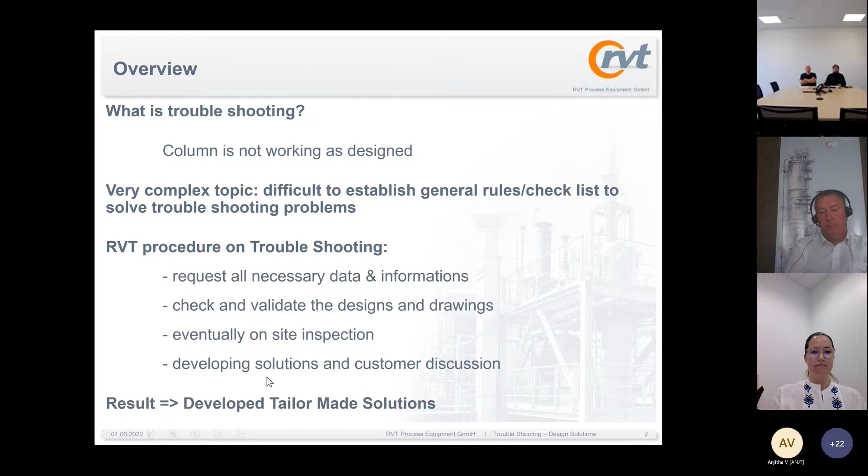So in this presentation, we will start talking about a troubleshooting problem which is commonly occurring for many customers we deal with, and it is troubleshooting related to fouling. Then we will present three case studies dealing with troubleshooting on different internal parts: a liquid distributor, a gas distributor, and a droplet separator. So I will start with the topic troubleshooting related to fouling.

As you know, if we are talking about fouling, we can identify regarding internals inside the column, packings, etc. We can identify typical problem zones.

There are more sensitive zones to fouling: liquid distributors, collectors, droplet separators, and obviously also the column sump. Packing can be seen as less critical, but only if we are talking about random packings with a considerable size, somewhere above 50 millimeters, and in combination with rather high liquid loads. If we have a very low liquid load, the fouling has an easier time accumulating at some parts.

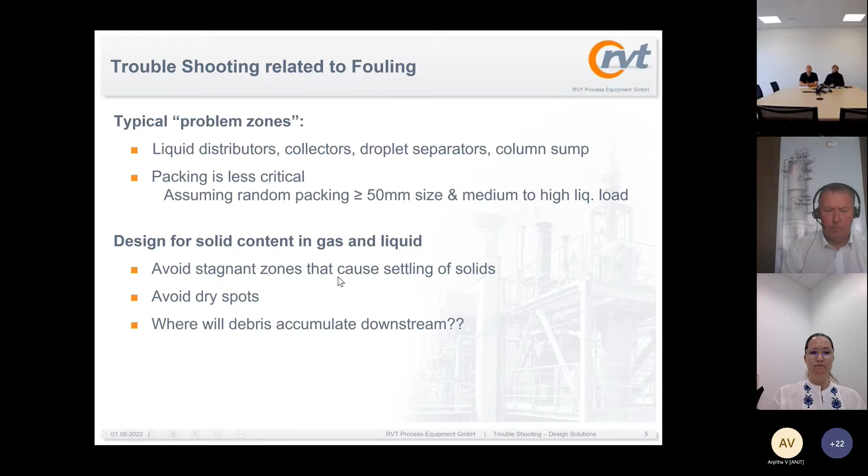Now I will continue. We obviously have designs that are optimized to deal with solid contents and to avoid stagnant zones causing settling of solids, to avoid dried spots. But nevertheless, customers have contacted us in the past, every year, with pictures showing blocked distributors after they saw a malfunctioning of the column regarding its performance.

So we see here a trough distributor made of plastic, and you can see that the troughs are almost completely, some of them, filled with mud. Then we are asked how we could optimize the geometry, the design of such internals, so that they do not require so much maintenance work, and especially not in such short periods of time.

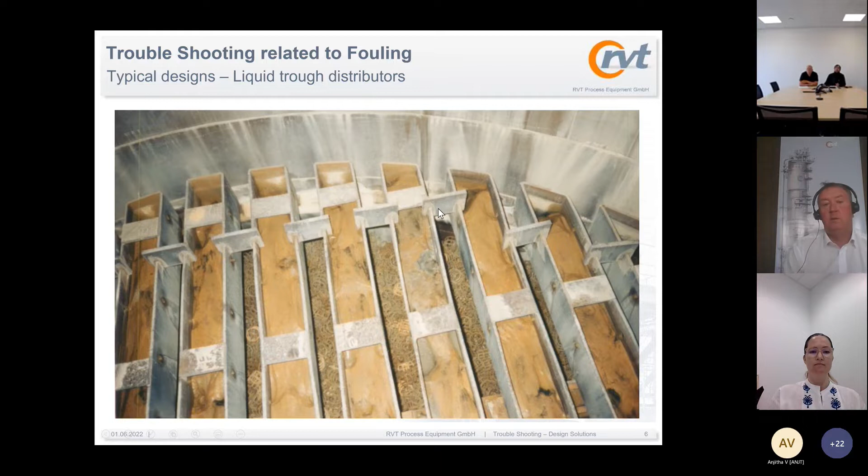The solutions we have developed and delivered to our customers dealing with very dirty, fouling applications, I would like to show you in the next slides.

Here you can see a special trough distributor design where we have used obviously big ground holes, as big as possible, in the troughs themselves. But we have here a special feature. You see here the main feed pipe and the secondary feed pipe feeding the individual trough. But you can see here a smaller pipe. This smaller pipe is now also delivering the liquid additionally at the end of the trough.

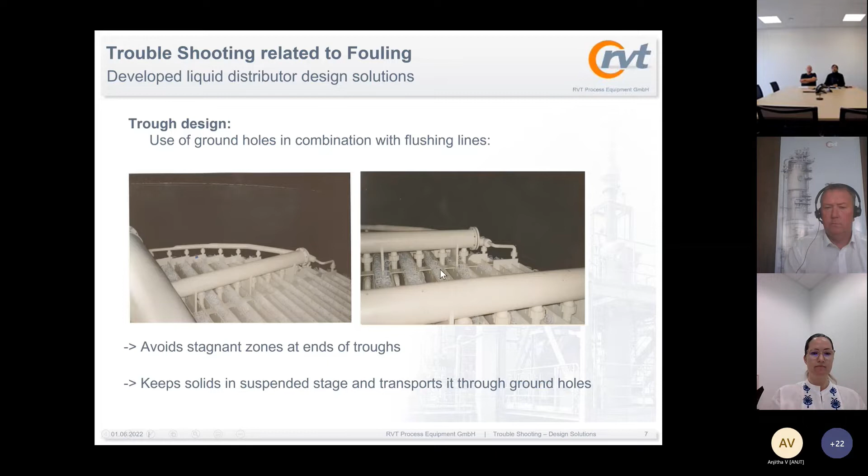At both ends of the trough, we would have symmetry, another pipe and another flushing. So here, the stagnant zone where the liquid is calm and the mud would accumulate is flushed, put into movement, forced to move, also at these critical slow motion areas, so that we avoid the stagnant zones, the solids keep suspended, and they do not accumulate in the trough causing this massive blocking of mud and malfunctioning of the liquid distributor.

Another possibility we have developed for a customer was to combine the troughs, so we don't have individual troughs with stagnant zones at both ends. Now we have a pair of troughs that have been combined, so that the liquid can steadily move continuously.

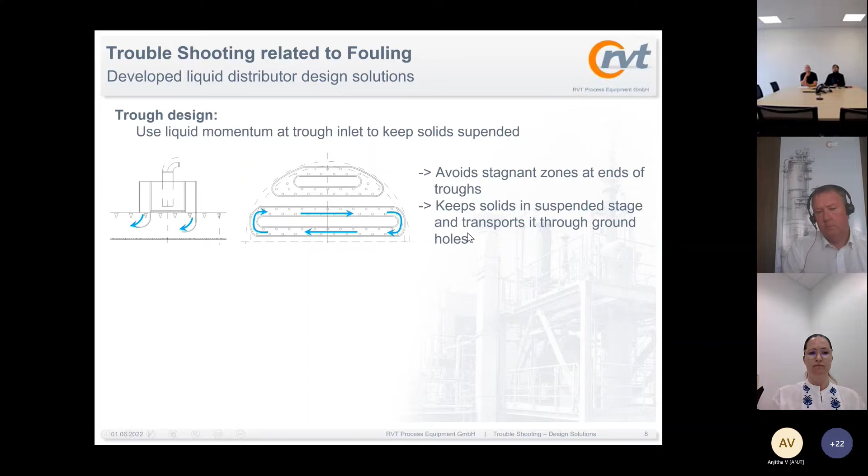And how we achieve this movement, here you see a parting box feeding the troughs, and the parting box has been foreseen with these bending, S-shaped plates, so that the liquid becomes a momentum velocity in one direction, so that solids are suspended and the mud leaves the troughs and does not accumulate. We have done this for a fertilizer plant.

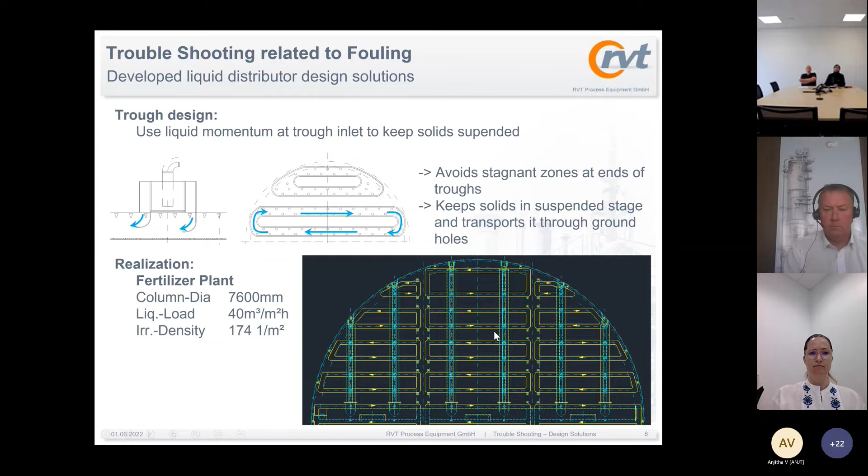As you can see here in the drawing, it's a huge column with support beams, and here you see the troughs inside the column, 7.6 meters in diameter.

Another solution that we developed for another customer: in this case, he had really big problems with the mud, and even though we presented these solutions, he wanted something even better, so he could really be sure that the mud, even when moving as in the other case, would not accumulate.

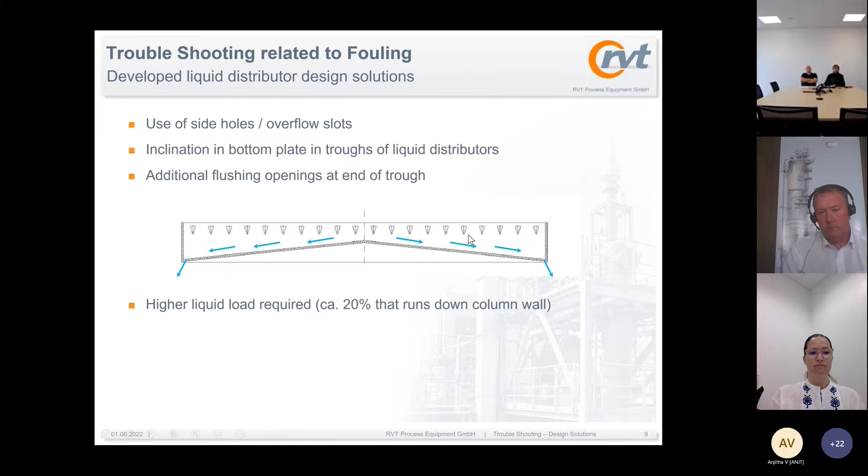So what we did, we used not a flat trough floor, but an inclinated floor. At the end of the trough, here and here, there is an opening at the bottom. You will see it here, in the built liquid distributor, the trough distributor.

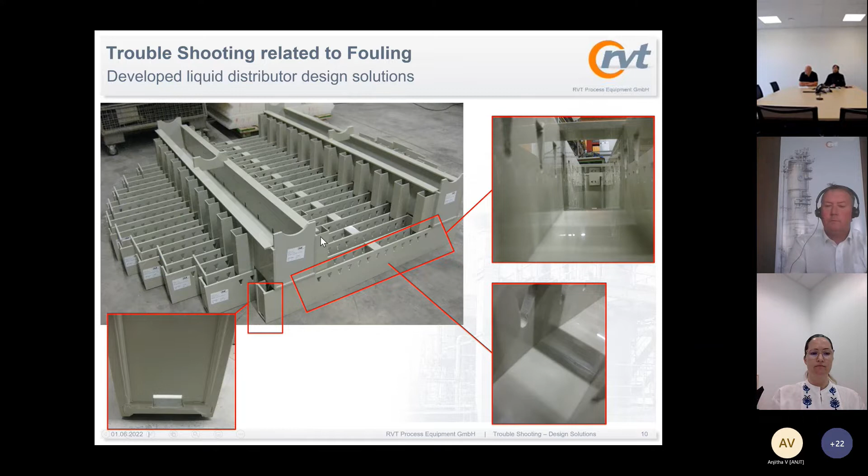As I said, now the troughs are not connected, but they have the bended floor. You can see here the middle section - this is exactly the middle, and then it goes down to the side here and here, and the very end is open. So now we don't create that movement, but by making these very big holes, and with the slope, we can be sure that the mud will easily leave the liquid distributor and not accumulate there.

And finally, for the same customer - or maybe another customer - what we did was a solution so he can flush the trough and free it from any solids during maintenance work.

You can remove this end plate. This end plate at both ends can be removed when maintenance works have to be done, and then liquid can be flushed inside the trough, and everything that might have accumulated will be very easily cleaned. And the most important thing, as you can see here, there's no need to dismantle this liquid distributor.

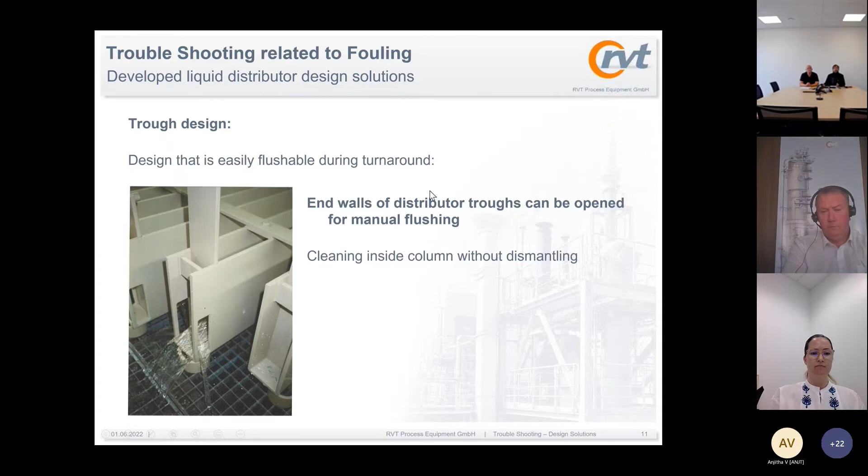During the maintenance work, you can easily remove the plate, put your flushing tube pipe here in the middle, and easily remove all dirt from the trough.

The next example that I want to share with you is how we offered a solution for a customer. He was having problems with a liquid collecting tray element. You can see how the collecting tray looked like - it was almost completely blocked.

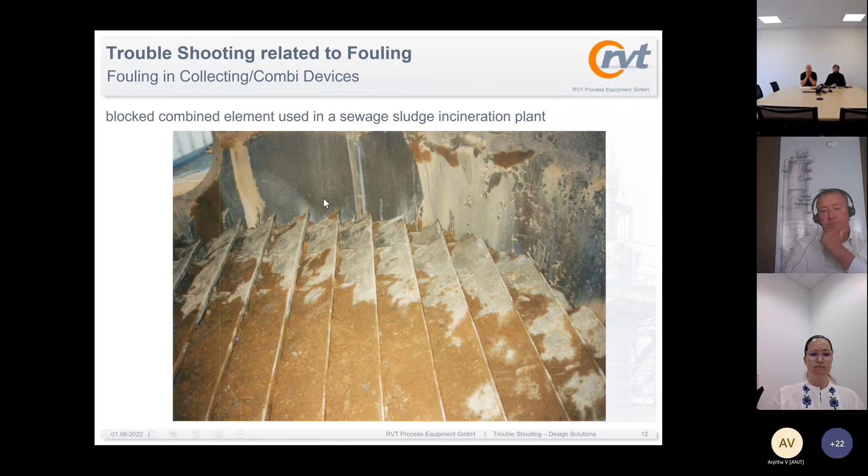This customer had already bought this combi element, or collecting tray element, from two different manufacturers, and with neither of them could he run the plant more than a couple of months before complete fouling of the collecting tray occurred. They contacted us to discuss this and find a solution that is not state of the art, because we also had similar constructions, but we developed a solution for him.

We presented that, and I want to show what we came up with. So you see here what we call the liquid collecting combi element. Combi element because it has two functions: on one side it supports the packing, it works as a packing support, but also as a collecting device for the liquid.

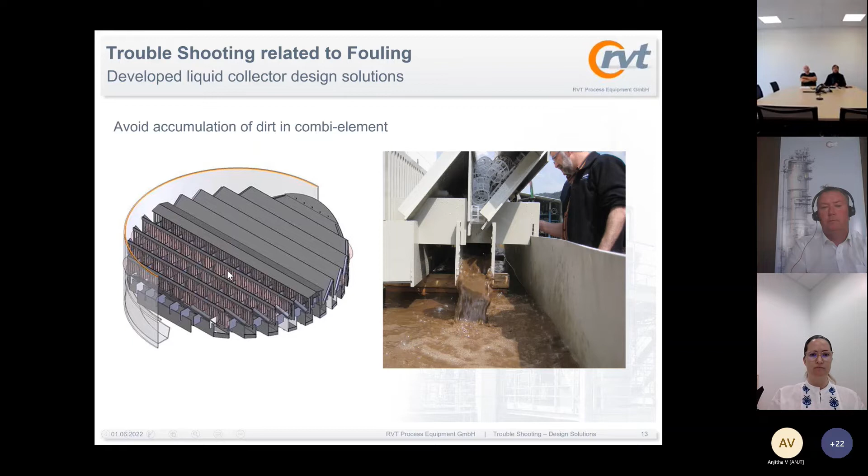And in this part, we have removed the collecting vanes that deliver the liquid to the individual troughs, so you can see what is below - this kind of grid. This is there so that the packing doesn't enter the trough and block the ground holes, etc. We need to foresee this.

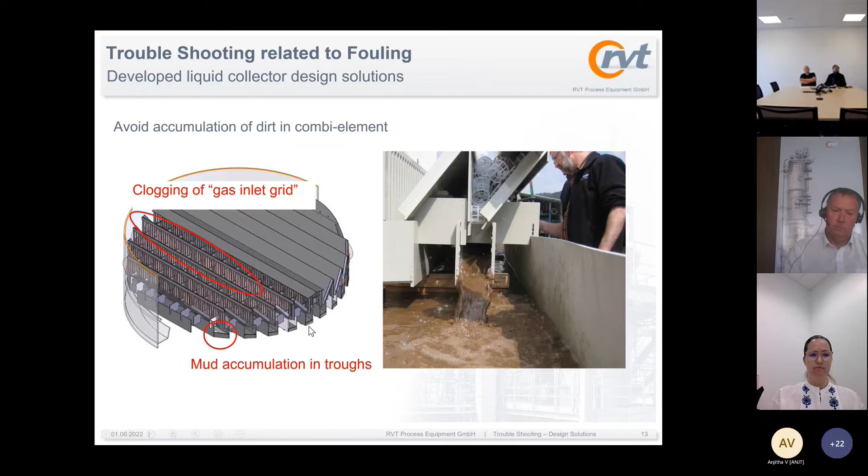But with this design, the disadvantage - this is the state-of-the-art combi element design - we have risk zones for fouling, for solid accumulation. This is the clogging at this inlet grid where the rings will obviously also be there, and on the other side, we have these stagnant zones at the end of the troughs where mud can accumulate.

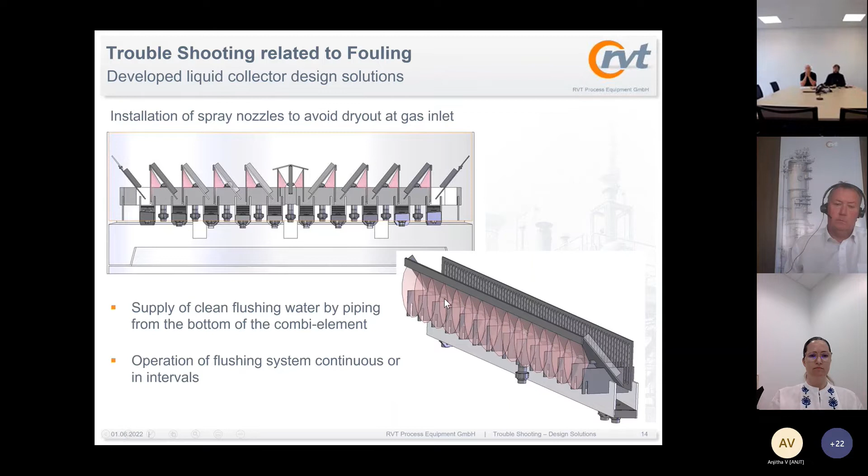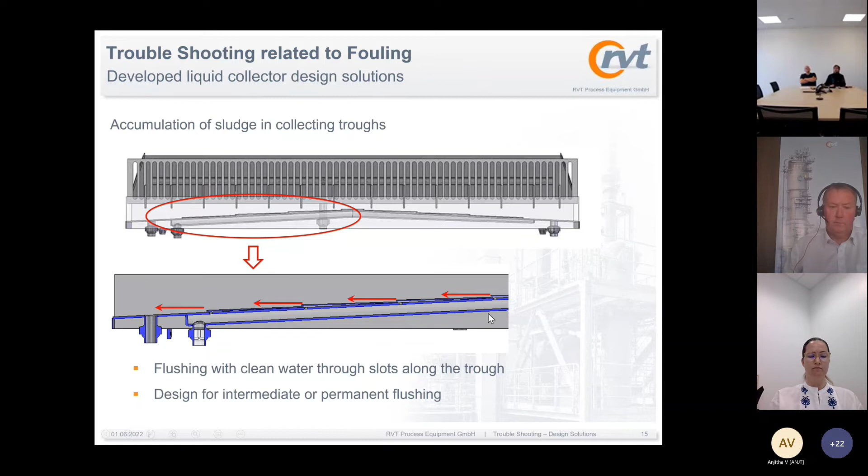The customer was very happy with this solution. It worked perfectly, worked excellently, and he can now run the column steadily without fouling problems. So it's a very good story to tell.

The next example I'd like to share has to do with troubleshooting on a liquid distributor, not dealing with fouling this time.

In this case, we were dealing with a flue gas scrubber in an incineration plant where heat was recovered by cooling condensation. The problem the customer faced was that the heat recovery the column was designed for couldn't be reached.

He opened the column and installed temperature devices, 16 temperature devices distributed across the column section. You see here an Excel sheet cut, with the numbering of the 16 devices, their positions, and the temperatures measured by each.

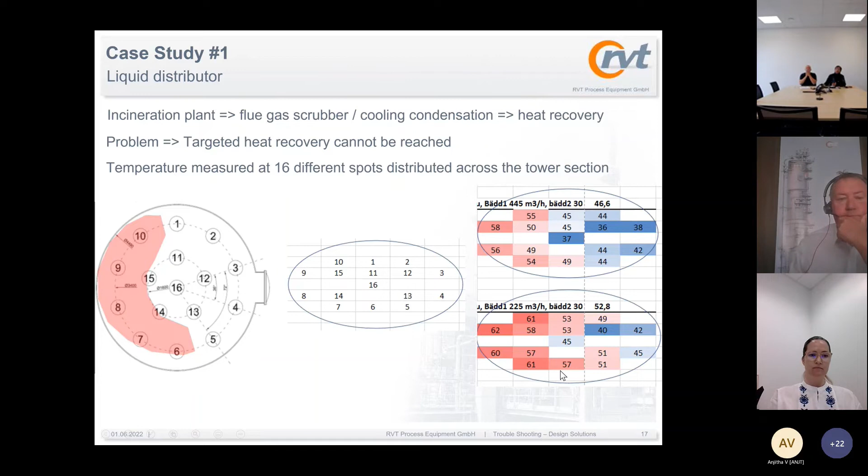Blue means colder, red means hotter, the darker blue the colder and the darker red the hotter. We can easily see there was a significant difference in temperatures depending on whether the devices were placed on this side versus that side. So we were asked what is happening in this column.

We looked at all the documentation we have regarding the column. It's a big column, above 4 meters in diameter, with 3 packed bed sections and a quench section below. There's a first condensing section where the gas is cooled down to about 40 degrees, and then a second bed above it to further cool down and recover more energy.

The first important thing we wanted to know was where these temperatures had been acquired. The customer told us they measured them above bed number 2. Having said that, we couldn't yet know what was happening, because we didn't have a temperature profile there to identify if something was coming from below and affecting what happens above. This was still an open question.

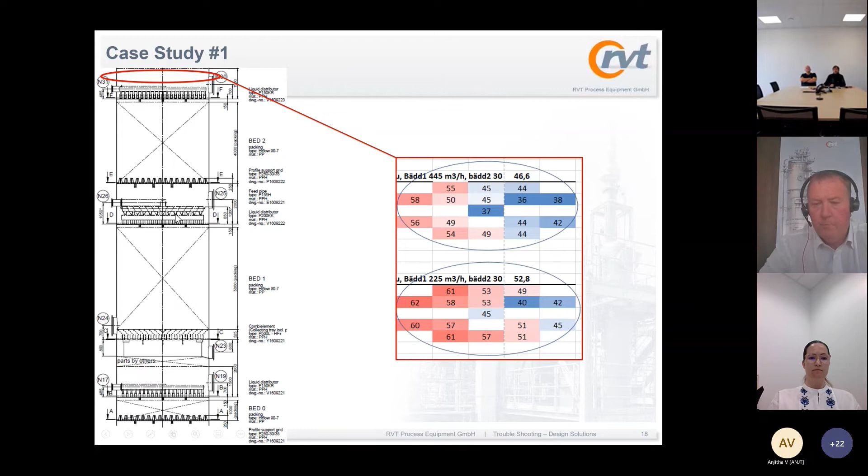What we needed to analyze was our design of the liquid distributor. How were both liquid distributors, here and here, designed? Is there any error?

So first we looked into the liquid distributor just below the section where the temperatures were taken. Here's the drawing of that liquid distributor. It's a trough type liquid distributor with single troughs, not connected. We weren't dealing with fouling here.

The liquid is introduced into the trough by a piping system with smaller pipes that have an orifice plate, which differs depending on the trough being fed. The orifice diameter is different because the central troughs need more liquid, having more drip points. So to achieve homogeneous distribution, the orifice plate feeding each trough has to be adapted.

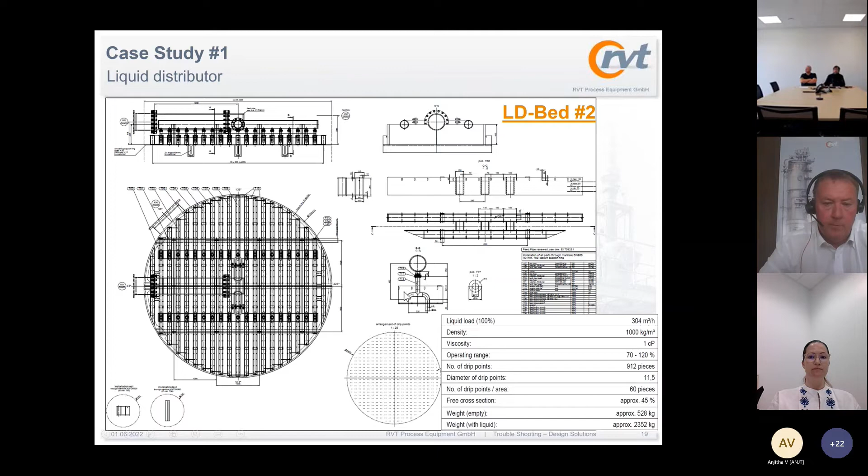So first we checked how the liquid distributor is designed.

We checked what liquid volume flow the liquid distributor was designed for, and what its operating range is. Is the liquid volume flow the customer is running the column at within the designed range, or are we above or below? If we're outside that range, the liquid distributor won't work as well.

But this was clarified, the problem was occurring under the design liquid volume flow for the distributor. So next we rechecked all engineered parts: have we designed the orifice plates well? Is there any error in our calculation? Are the drip holes at the bottom of the troughs correctly designed? Everything regarding this was correct.

The next question we needed to ask is, has the liquid distributor been correctly installed? As I said, the orifice plates are delivered and might have been interchanged, so the wrong flow might be going into a trough that shouldn't get that amount. Or we need to check the levelness of the distribution trough, since that delivers a different height level in the trough, and then the liquid flow coming out will be different depending on that. This is also something to be checked.

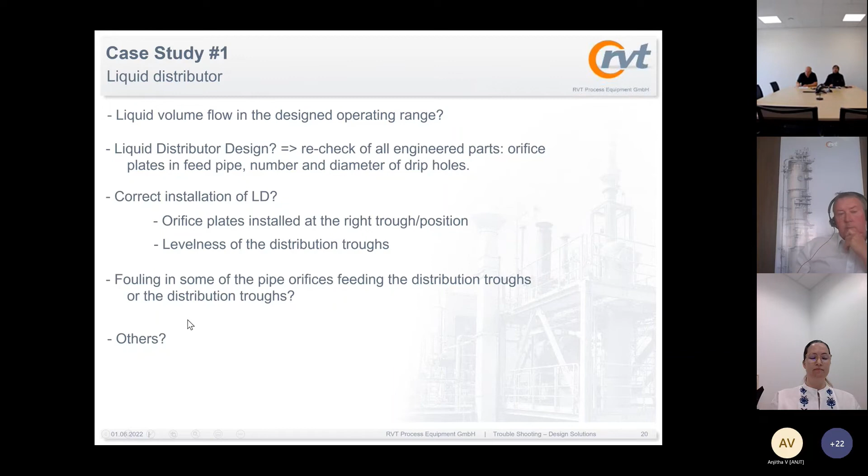So we offered our customer to go on site and check the liquid distributor ourselves. We had the possibility to run it with water, open the column, go to the manhole, and operate it with water. We could measure, and we could see there was no debris, no fouling.

We checked the orifice plate diameters, and most importantly, since it was running with liquid, we checked the liquid level height at every one of the troughs building the liquid distributor. The liquid level was homogeneous, so there was no reason for concern, and the liquid distributor was leveled.

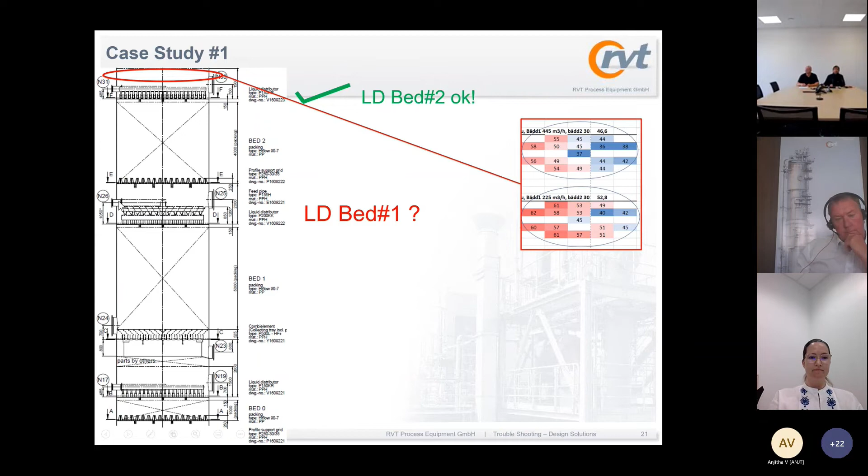Both things obviously depend on each other, but we didn't identify any reason on site why this liquid distributor should be causing the problem of heat not reaching the heat recovery and this temperature profile. So our focus now turned to what was happening on the lower bed, bed number 1, mainly the liquid distributor there.

So we looked at the drawing of the liquid distributor. This one is slightly different. On one side we have these vanes, which again deliver the liquid inside the troughs. We have a trough distributor again, but the vanes also collect liquid coming from bed number 2, the upper bed, and bring it to the trough, so the liquid being additionally introduced mixes with the liquid above, and then feeds the packed bed below.

There is a piping system, but it's not directly feeding the troughs anymore. Instead, the piping system feeds two parting boxes, or pre-distribution boxes - these square, rectangular things here and here. These are the parting boxes. Here you see a detail of the parting boxes, top side and side view.

The parting boxes, as many of you know, have openings on the sides, sometimes also on the bottom, and each of these openings feeds an individual trough below.

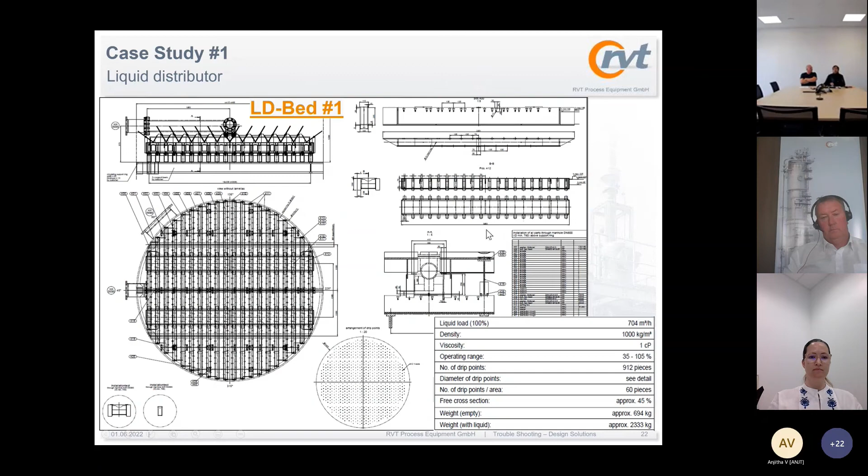So we needed to check again. For this second distributor, for bed number 1, we needed to ask ourselves the same questions. We checked that it was working within the design operating range. We checked all engineered parts: the slots in the parting boxes, the number and diameter we designed, the drip points - everything was checked. What we couldn't check while on site was the installation of the liquid distributor, and obviously all other related questions.

But what we could clarify was the orientation of the liquid distributor in respect to the temperature profile that had been acquired, and this was its orientation. So now we will see what the customer...

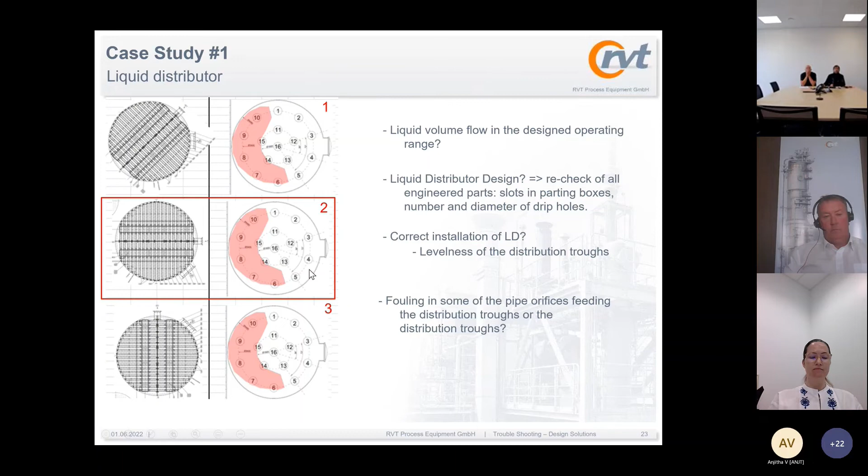We asked the customer if he had the possibility to check. After we left, he had the chance to check the levelness of the liquid distributor of bed number 1, and this is what they discovered: the liquid distributor was not well leveled.

Better said, not the liquid distributor itself, but the supporting system of the liquid distributor. For such a big column, we need not only a support ring, but also support beams. They identified a difference in level of up to 20 millimeters between this side and the opposite side, and these matched very well.

Now you see the same picture, but we needed to rotate it in order to show the correct orientation with respect to the temperature picture that he delivered. This is the liquid distributor orientation in respect to that.

You can see that the minus 20 millimeter section, where the troughs are lower, where the liquid level on the trough will be higher, and therefore more liquid will come down, is exactly located at this part. Where much less liquid will be accumulating in the trough will be this section here. This was matching very, very well with the temperature profile they were measuring.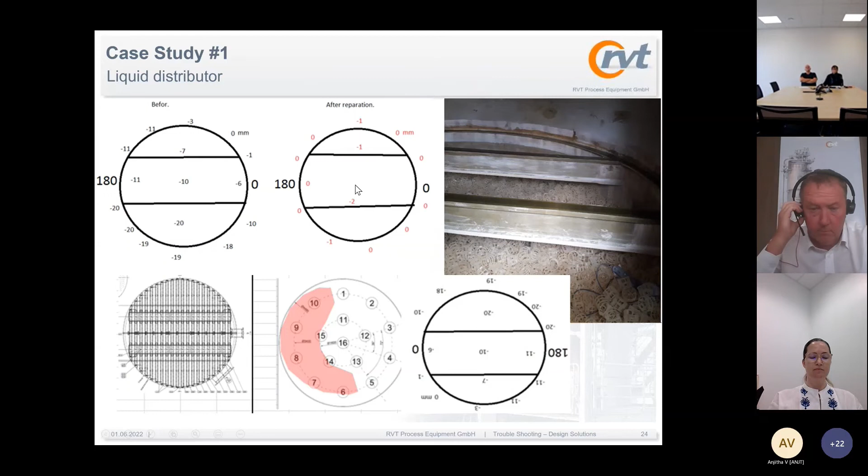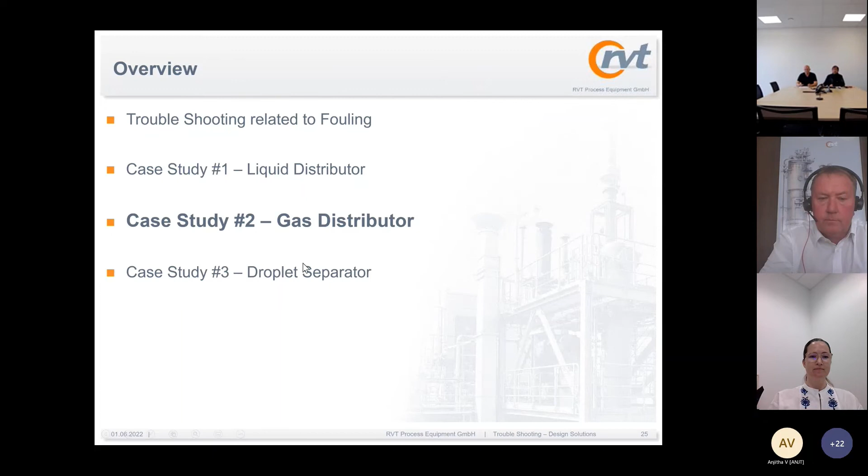So now we come to the next case study that we wanted to present to you. It has to do with a gas distribution problem. In this case, we are dealing with a hypochlorite absorber in a municipal water plant.

We delivered everything, not only the internals but also the column itself, made of PVC ECTFE. At the top, a solution of sodium hypochlorite is fed, and at the bottom, chlorine gas is introduced.

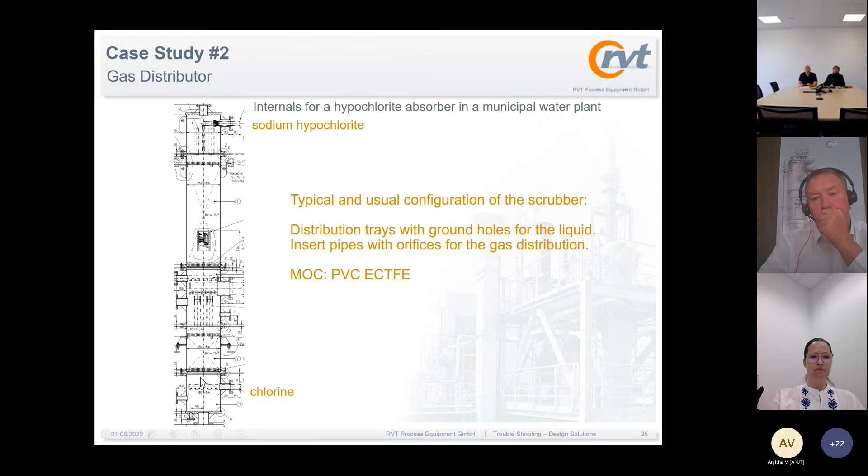The liquid distributor consists of ground holes, and the gas inlet device consists of an inlet pipe with ground holes for gas distribution. It is a small column, about 500 millimeters in diameter.

Some months after start of operation, the customer contacted us saying he was experiencing a chemical attack, probably occurring in the nozzle pipe L, which is very near the bottom of the column. It's just a nozzle to measure the level of the sump.

Here you can see he holds a lamp, a light, and the PVC had become so much thinner through corrosion that the light could be seen through it. Astonishingly, this was only happening at this very specific spot.

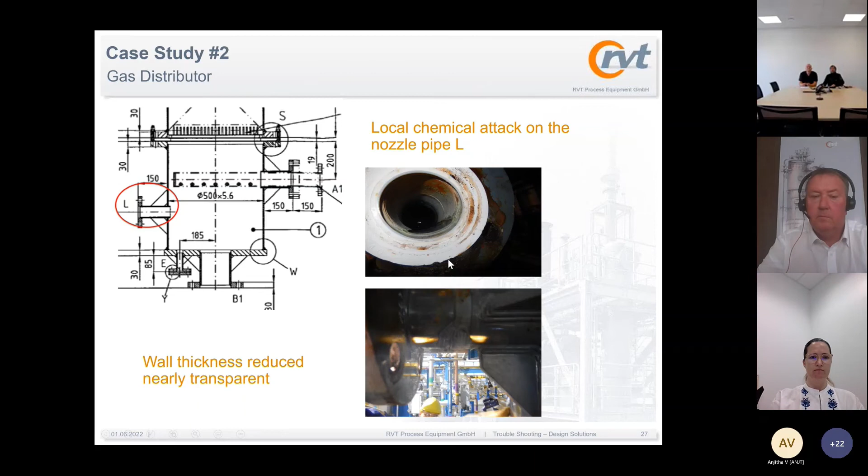He was not really experiencing any problem with the overall function of the column, but he was just seeing this chemical attack at one spot, and he contacted us. What might be happening here?

We looked at all the design data for the column, the gas load, the liquid load. We checked the gas velocities, the design of the pipe, and gas velocity in the column and inside the pipe. We couldn't really find any failure in our design that could explain this. It was difficult at the moment, regarding process data, to identify much.

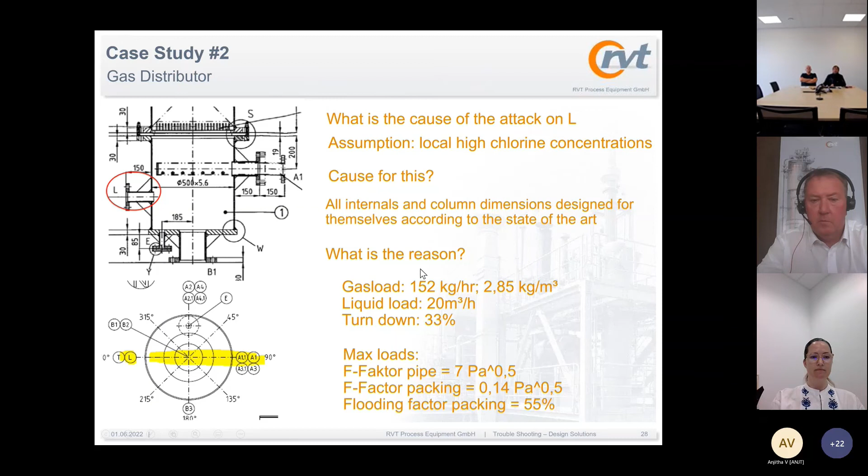But then my colleague Uwe came up with an idea to explain why it was happening locally right here. He thought that it might be due to the very high irrigation density. We have 102 cubic meters per square meter per hour, which is a very high value.

So much liquid coming out freely from the packed bed might be affecting the well-designed gas distributor in a way that some part of the fed chlorine gas is being pushed to this part, causing the chemical attack problem there.

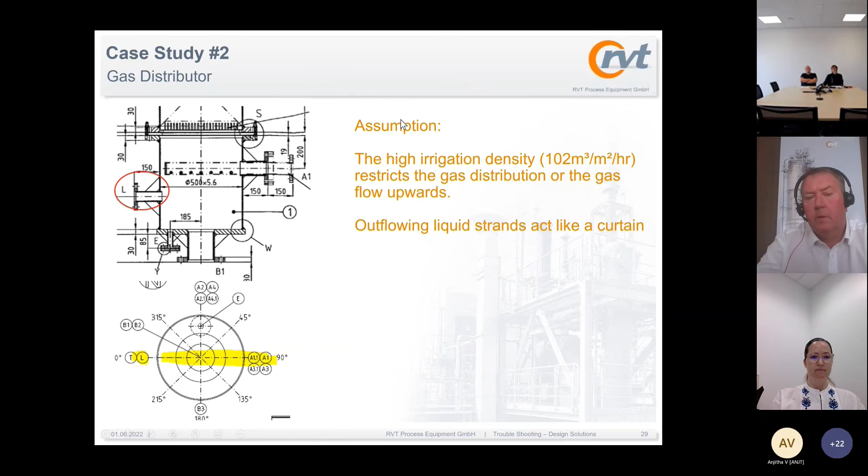Not having much better assumptions for this problem, we discussed it with the customer and presented a possible solution we would like to try, to see if it solves the problem: to separate the liquid and gas so that they don't see each other.

So how we do this, we use a collecting tray. Here you see the gas chimneys. The gas obviously needs to have a path to flow up to the packed bed, but now the liquid will have to accumulate and it will be forced to come only through this central downcomer pipe.

And the gas will come homogeneously distributed inside the column, then it will only flow through the homogeneously distributed chimneys here, and it won't see the liquid and won't be affected. The fact is that we built this tray and the problem was solved. There was no further damage report after this modification was done. So again, a very successful story.

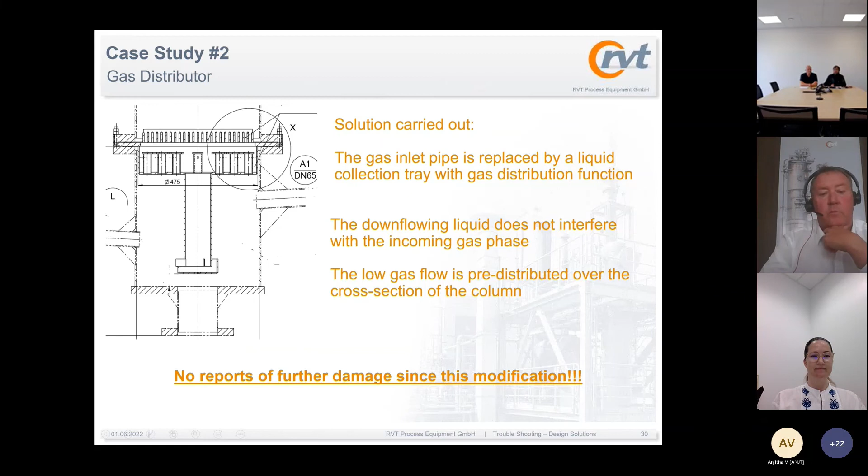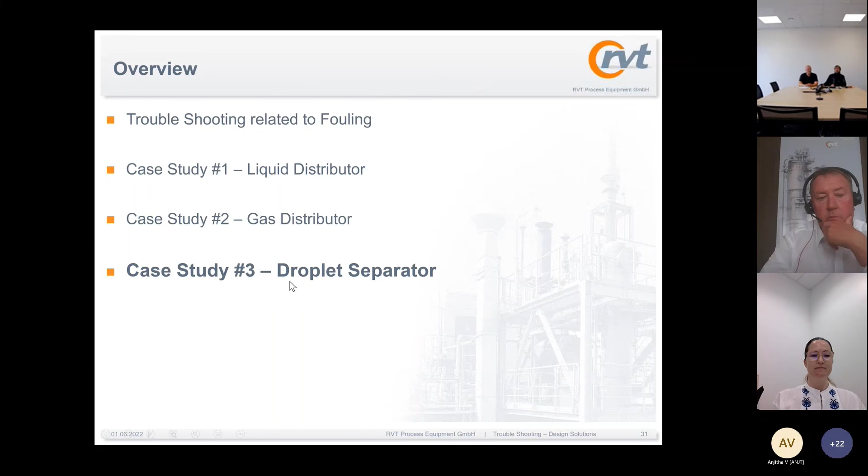So now for the last topic regarding troubleshooting in droplets, regarding droplet separators, I will give the word to my colleague Uwe Franz, and he dealt with this problem directly, and he will present it to you. Yes, hello. And this is a completely other thing, because it's now not on a column on land, it's on a scrubber on a ship on the oceans.

And the problem was, you see the chimney of the ship, and you see a lot of droplets. And the droplets fall down on the ship and cause black spots. We call it black rain. This means that the inside mist eliminator in the scrubber was overloaded.

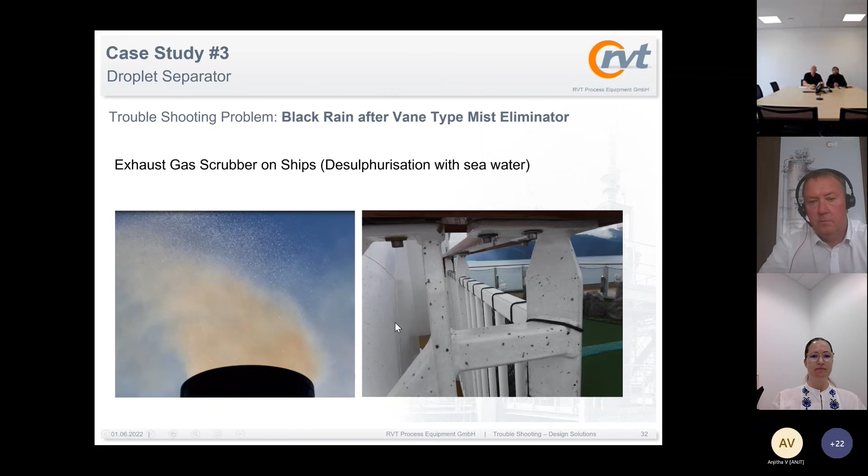So here you see the typical design of this scrubber. It's a spray scrubber. They're washing out SO2 with seawater, and the velocities are well on the limits of this system. As normally here, this is the exhaust gas from the motors, from the diesel engines, and here's a spray washing system, and on top, a normal vane-type mist eliminator.

And a vane-type mist eliminator also has, for the design, a maximum velocity when it works. Normally this maximum velocity is given on the active area of this vane-type mist eliminator, the net area. But we found that the engineering company who had done the design did not apply this maximum velocity on the net area, he took it on the gross area of the vessel.

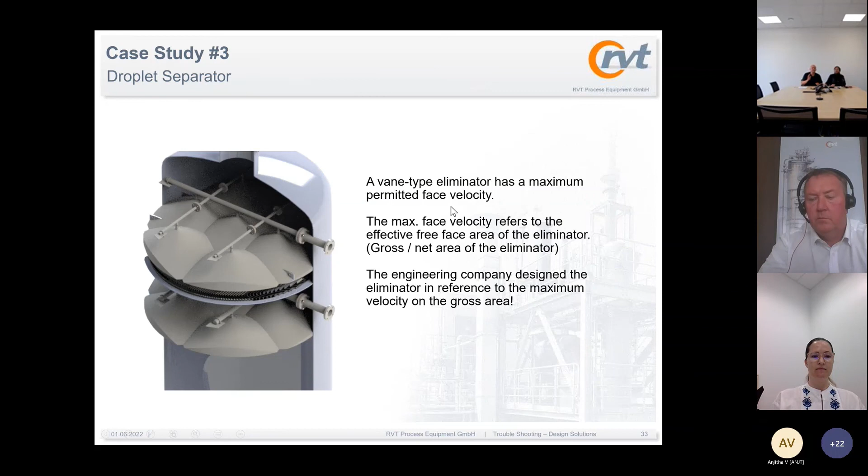And therefore the mist eliminator got a much higher liquid load, a higher gas load, than specified. And the customer asked us to find a solution.

Another problem is, you understand, the ships should be sailing on the ocean, and the standstill times are very low, very limited. And the scrubber was too small, and it would mean a very huge amount of work if you had to do structural changes on the scrubber. It's an extremely high amount of work.

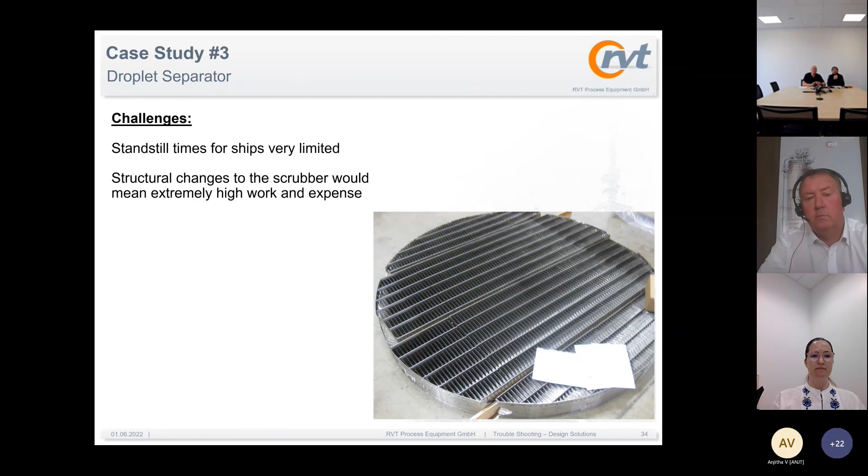So we developed a very open pre-separator. Open means that the liquid load for this pre-separator could be very high, as it does not take out all the liquid, it takes out only a part of the liquid.

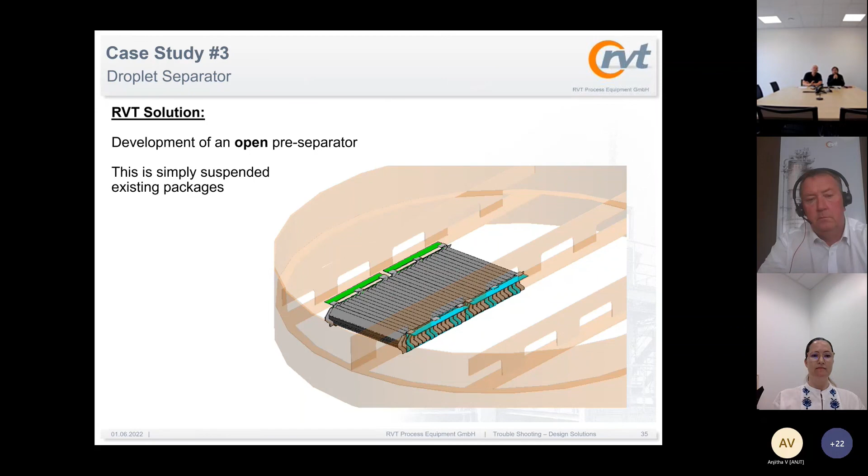And the other thing was the pre-separator should simply be suspended or hung up on the existing weld-in parts. This means the customer could make the modification in a very quick time. They only had to remove the existing blocks of the vane-type mist eliminator and hang up these new blocks inside.

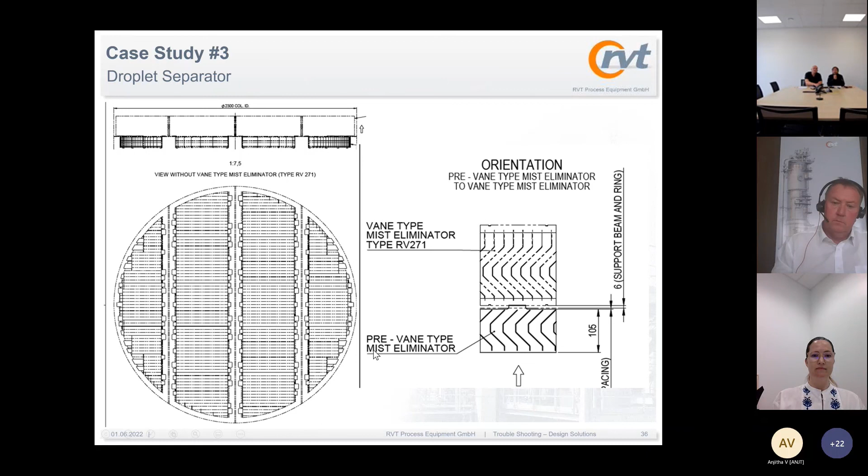And here you see also a detail of this function. This was the existing one, and this was a pre-vane-type mist eliminator, but we hang up also. The customer made a test on one ship. This was very successful, and he also implemented the solution on further ships. This was a very short example for mist eliminators.

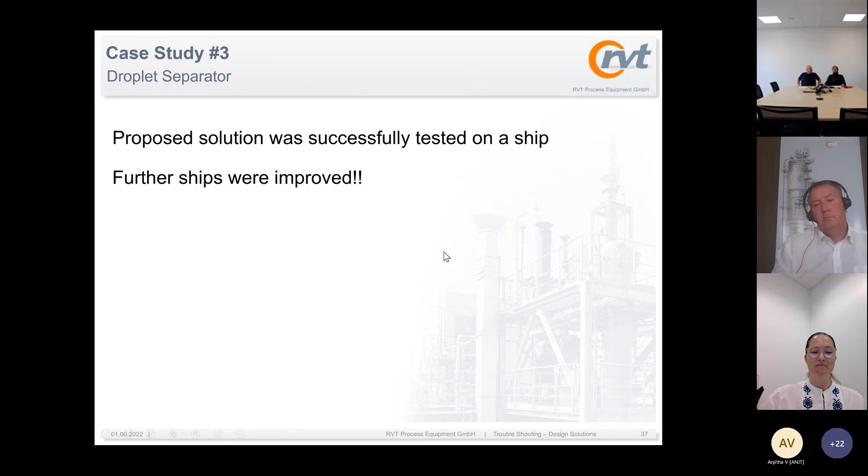Yes, and with that example, I think we have run over time, and therefore I would like to just summarize the presentation. I hope we could show you that troubleshooting is a rather complex topic, that we need to develop very specific solutions to very specific problems.

But we have accumulated a good experience throughout the last decades on troubleshooting. We have shown you further examples on how we develop different tower internals to solve troubleshooting problems. And what we would like to strengthen is that you please contact us at any time. We would be glad to listen to you and to discuss together your challenges regarding troubleshooting, and find together a solution, sharing our experience or learning together how to improve the plant and also our internals and products.